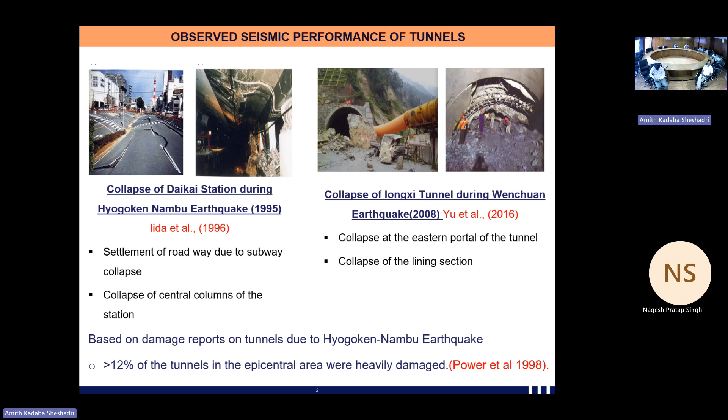So with this motivation, we attempted to understand how the performance of tunnels would behave under earthquake conditions. For that, we have aimed for both experiments and numerical study.

So in order to achieve that topic, we have gone through a few literatures wherein mostly the literature have been focused on tunnels embedded in dry sand and also in liquefiable sand.

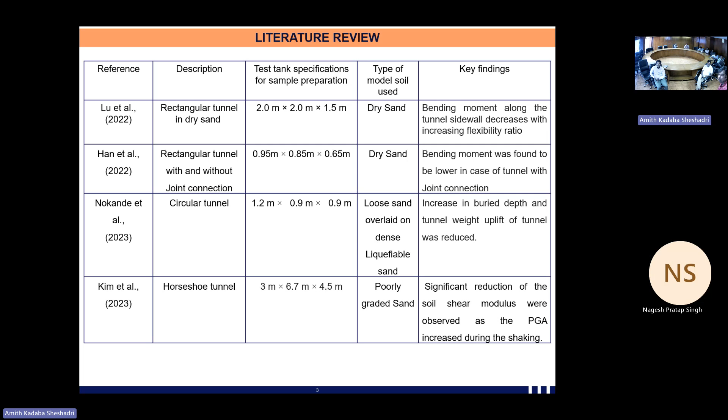But few studies have been conducted in varying saturated sand, and also few literatures have concentrated numerically, wherein mostly the shape, thickness, embedment depth, and flexibility ratio have been used as parameters for analyzing the tunnel using numerical analysis.

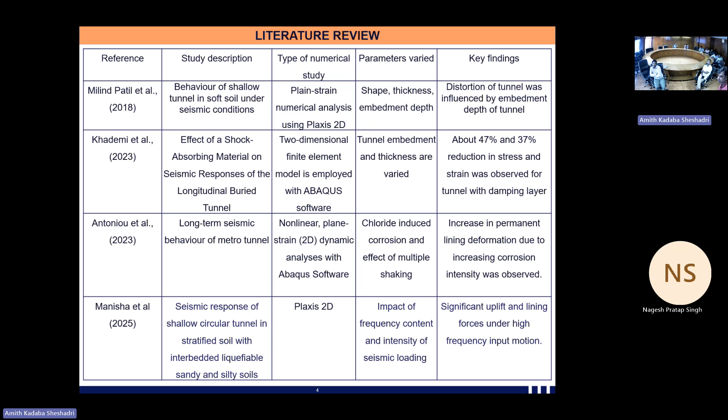So based on this literature, we could see that mostly the frequency and embedment depth of tunnel plays a significant role for understanding the tunnel soil interaction.

And also the acceleration showed higher amplification based on the past literature because of the increase in frequency of input motion. So this gap has motivated me to select influence of embedment depth and frequency on behavior of tunnel.

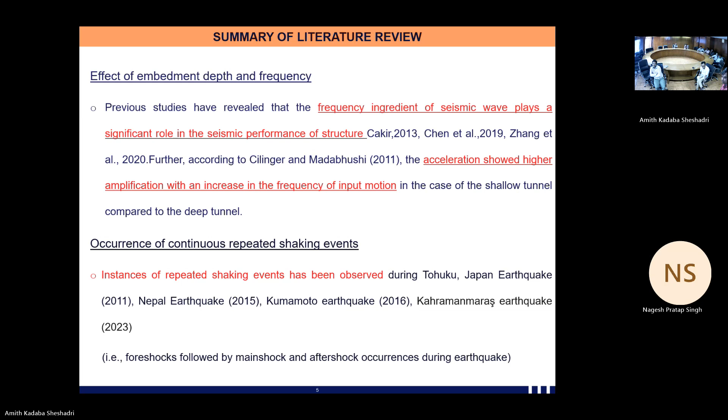And apart from this, we have observed from past literature and also from past case studies that there is an occurrence of continuous repeated shaking events, which has been observed during the Tohoku Japan earthquake, Nepal earthquake, Kumamoto earthquake, and Kahramanmaraş earthquake. Very few studies have been conducted considering the repeated shaking events.

And one more significance of the proposed research work is based on the construction of metro tunnel network, particularly in North India, wherein we could see that during 2002, only 25 kilometers were operational, whereas during 2022, more than 1,000 kilometers are operational.

And mostly these tunnels, which are situated, are in silty sand deposits, and with varying water table, it would affect the structures which are coming over those deposits. So considering all these topics...

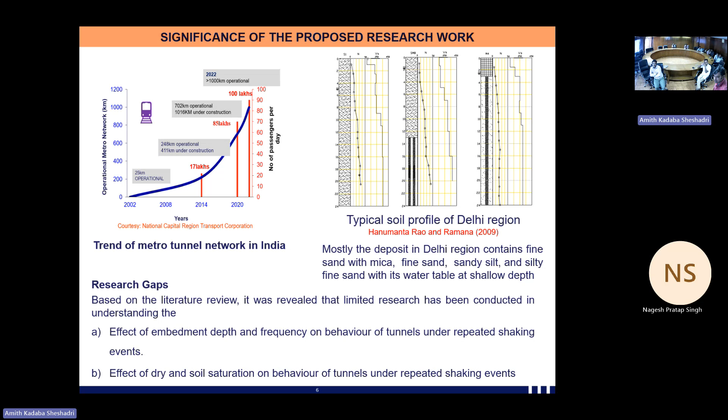Primary objective, one is considering the economy, considering the extent of economic loss, we formulated the research gaps and objective. And the main objective of my PhD topic is how investigation on tunnel soil interaction could be done using experiments and numerical studies.

For the experimental investigation, I have taken the influence of embedment depth and frequency as a primary parameter on behavior of tunnel in dry sand.

And further, we attempted to understand the influence of varying ground saturation condition on tunnel embedded ground subjected to repeated shaking events. And further, after completing all these experiments, we also tried to validate the numerical model using the experiments.

And again, we attempted to understand the effect of repeated shaking events, and at the end, how the effect of ground improvement could be effectively used for mitigating the vulnerability of tunnel. So this is the overall view of my PhD work.

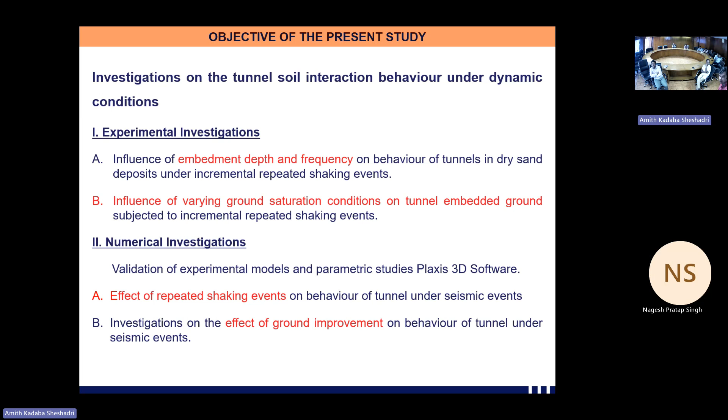And when it comes to approach one, initially the experiments were conducted in dry embedded ground. Particularly, I have chosen relative density of 52% corresponding to medium dense sand, and two embedment depths have been chosen with 5 Hz and 10 Hz frequency.

And the input motion used in this study were 0.2G, 0.3G, and 0.4G as repeated shaking events with 40 seconds duration.

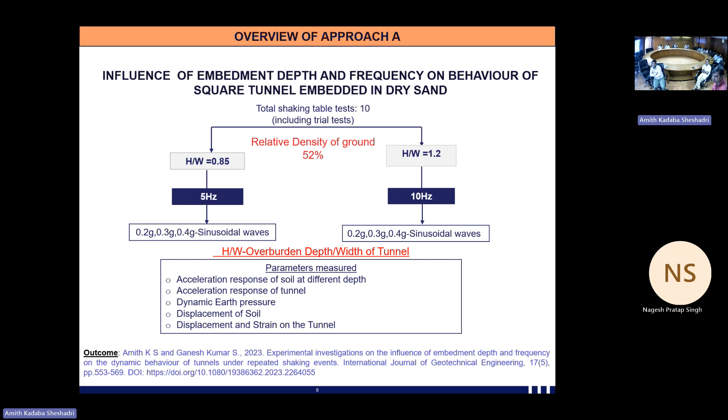For analyzing the tunnel soil interaction response, I have measured acceleration response of soil at different depth, acceleration response of tunnel, dynamic pressure, displacement of soil, and displacement strain on tunnel.

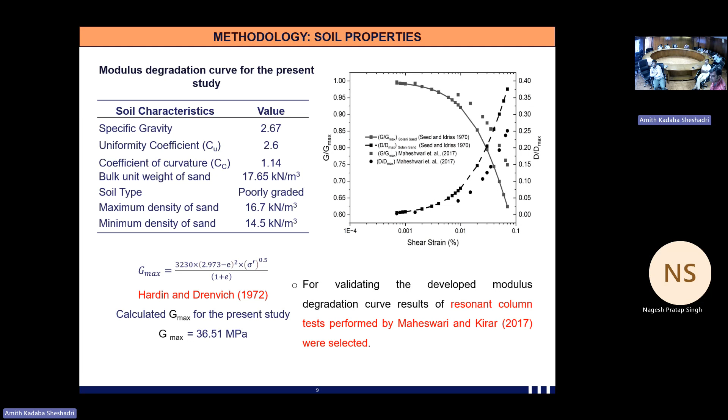For conducting this study, mostly the soil was characterized as poorly graded, and we also tried to develop a modulus degradation curve using empirical relationships. We validated the developed modulus degradation curve using resonant column tests conducted by Maheshwari and Kirar, and we could see that it comes under a similar range of the already available relationships.

For the experiments, the shake table was used, with dimensions of 2 meter by 2 meter and a payload capacity of 3 ton. The operational frequency ranged between 0.01 to 50 Hertz with an acceleration range of 0.01 G to 1 G.

The tank dimension used for the study was 1.7 meter by 1 meter by 0.7 meter. This is the actual scaling laws used in this study, where a 1:10 scale ratio was used to scale down the tunnel. Accordingly, the dimension of the tunnel is internal length of 270 mm and external length of 270 mm, and length of tunnel of 740 mm, according to the specification of the test tank dimension.

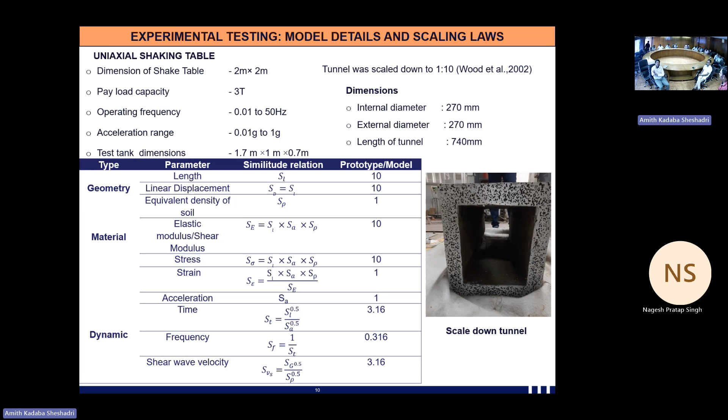This is the instrumentation details used in this study, where 3 accelerometers, 2 earth pressure sensors, and 2 displacement sensors have been used for both embedment depths. We also measured the acceleration response of the tunnel by placing 2 accelerometers at the tunnel top and 1 earth pressure cell at the tunnel top.

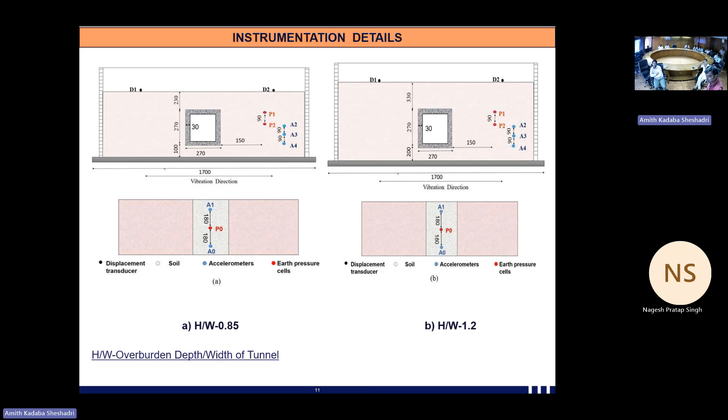Another part of this study is finding out the displacement strain on the tunnel using non-contact digital image correlation, wherein we could measure the displacement of the tunnel by taking a reference image initially before the test. We could also measure deformed images during shaking, and these two images were correlated for finding out the displacement of the tunnel. For this we used VIC 2D software for conducting the analysis.

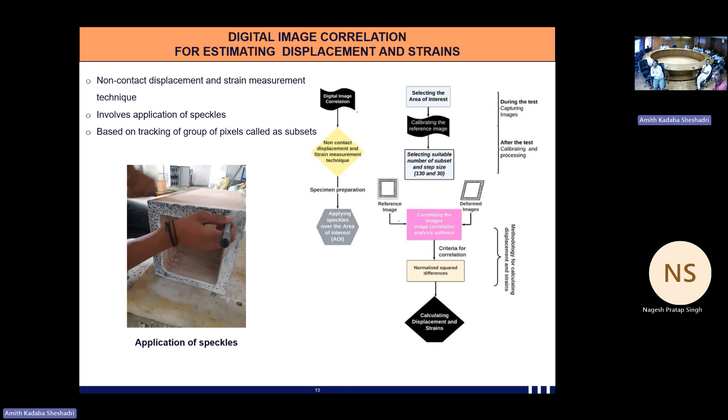Based on the experiments, during 0.2G shaking corresponding to height to width ratio of 0.85, minimum displacement was observed because of its in situ density. For 0.3G shaking, significant maximum settlement was observed, mainly because densification occurred at this 0.3G level. Further doing 0.4G shaking, there was a reduction in soil settlement, mainly because of densification that occurred during 0.3G shaking. So both frequency and embedment depth and confinement characteristics play a role.

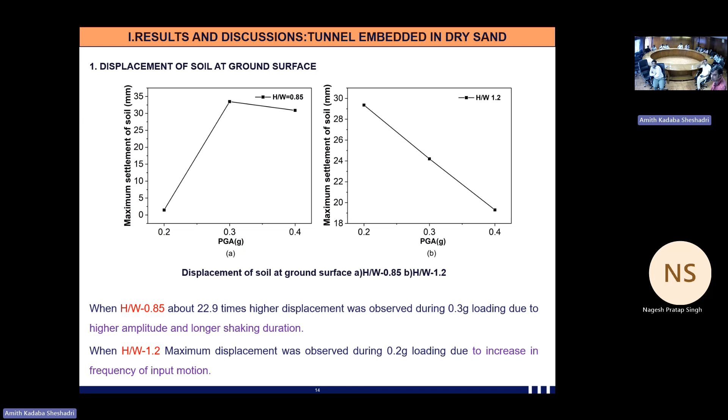About 22.9 times higher displacement was observed during 0.3G shaking for height to width ratio of 0.85. Whereas for height to width ratio of 1.2, initially itself maximum densification occurred, primarily because there was an increase in frequency for this case, which affected the displacement response.

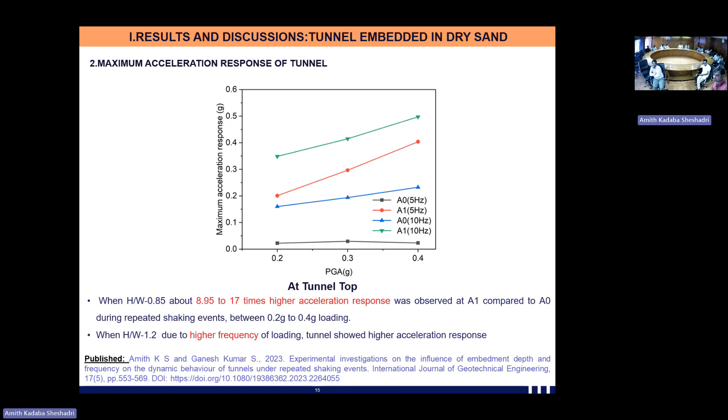We also measured the acceleration response of the tunnel. From this figure, we could see that the front end of the tunnel showed higher acceleration response compared to the rear end, and with increase in frequency, the acceleration response also increased. This is primarily due to the non-uniform densification which occurred due to shaking, which affects the acceleration response of the tunnel.

We also measured the acceleration response within the soil, and from these figures we could see that with increase in embedment depth, acceleration response also increased, and at shallow depth there is higher acceleration response, primarily due to soil nonlinearity. For the 5 Hz frequency, about 34 to 58% increment in acceleration response was observed, and for height to width ratio of 1.2, about 17.9 to 33% higher acceleration response was observed at different depths.

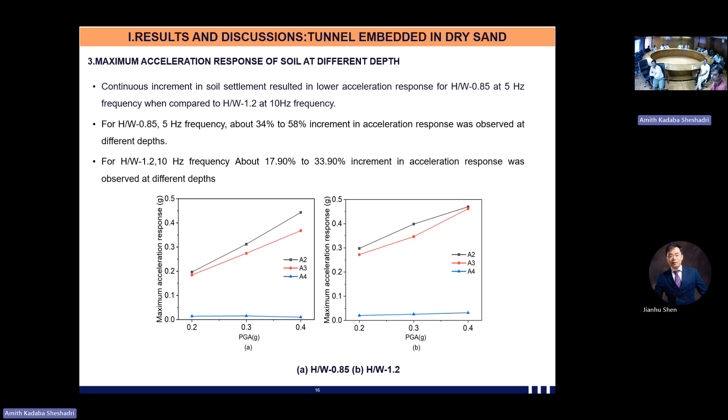We also measured the displacement of the tunnel using digital image correlation, and we could see that with increase in input motion, the displacement increased for the case of height to width ratio of 0.85, a similar trend observed for height to width ratio of 1.2, although higher displacement was observed during the 5 Hz frequency case.

The reduction in displacement is primarily because of higher confinement characteristics for the height to width ratio of 1.2, which affected the displacement response.

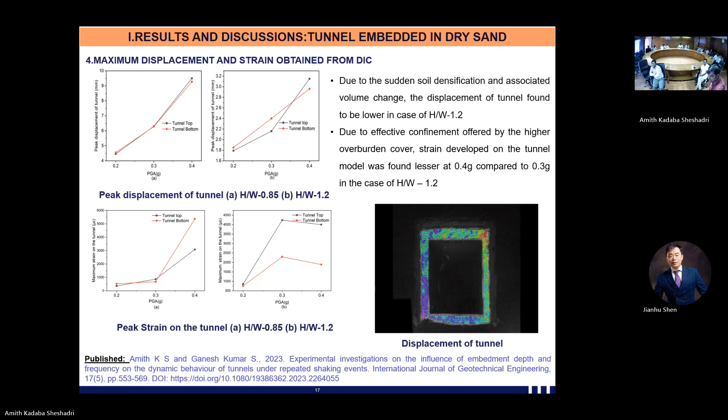We also measured the strain, and using the strain response, we can see that for the 5 Hz frequency, increment has been observed for the case of 0.2G, 0.3G, and 0.4G shaking, whereas after 0.3G shaking for the case of height to width ratio of 1.2, sudden reduction in strain have been observed for the 0.4G shaking.

This could be related to the development of earth pressure, which affected the tunnel soil interaction response. Primarily because of the variation in stress between the tunnel and the surrounding soil, the strain also varied.

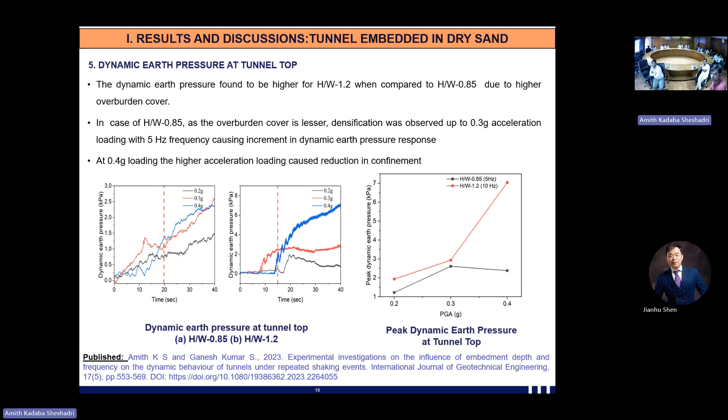Based on this study, we could conclude that the application of 5 Hz frequency during repeated shaking induces an increment in soil densification, which contributed to overburden stress around the tunnel system, affecting the response.

Similarly, about a 14 to 58% increment in dynamic earth pressure was found up to 0.3G loading for both embedment depth conditions. In the case of height to width ratio of 0.85 when subjected to incremental shaking, there is a steep increment in strain.

This steep increment in strain was observed from 0.2G to 0.4G shaking, mainly because of the lower confinement. In the case of height to width ratio of 1.2, the reduction in strain at higher acceleration loading is due to improved confinement offered by the adjacent ground.

This research has been published in the International Journal of Geotechnical Engineering in 2023.

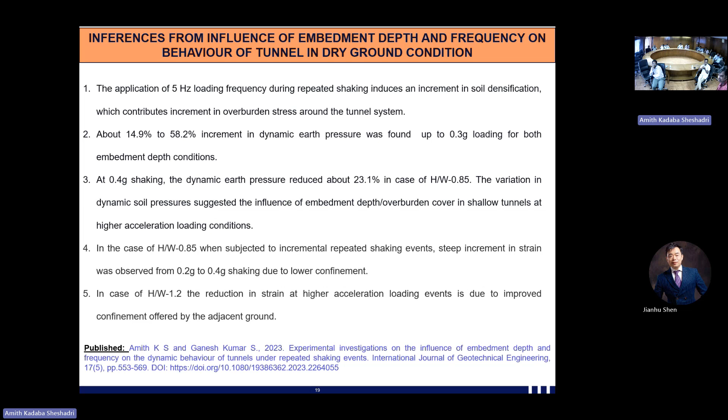Further, after conducting this study, we thought of understanding how saturation would play a role in affecting the soil interaction response. So we took both square tunnel and circular tunnel as our objective, wherein for the square tunnel we tested 25%, 50, 75, and 100% for varying saturation test cases.

Sinusoidal waves from 0.1G to 0.5G shaking have been given as input corresponding to 5 Hz frequency. Here also we try to measure the tunnel soil interaction response by measuring acceleration response at different depths, pore water pressure, dynamic earth pressure, displacement of soil, and displacement of tunnel.

When it comes to circular tunnel, similarly, we attempted to understand whether there would be any changes. So we varied the saturation to 50, 75, and 100 percent, and here we used scaled down earthquakes of Kobe, El Centro, Chichi, and Japan earthquake, all applied as repeated earthquake motions.

For conducting this test, initially gypsum was used for sample preparation of the scaled down tunnel, and similar to previous cases, we used a hopper arrangement for sample preparation, with wet sedimentation technique used for achieving saturation. The sand used was Solani sand, similar to the previous objective, and 4 pore pressure sensors, 2 accelerometers, 3 earth pressure cells, and 1 displacement sensor were used for monitoring the variation in response.

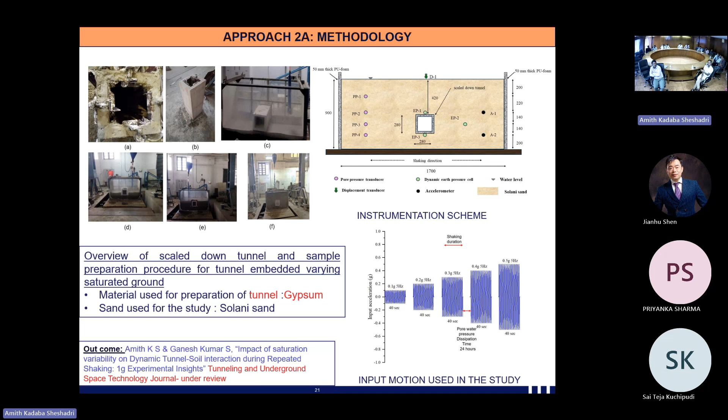Based on the experiments, we actually used only 2 accelerometers and displacement sensors as told earlier.

For the shallow depth, higher acceleration response was observed compared to deeper depths. We could see from the graph that up to 0.3G at shallow depth, higher acceleration response was observed, beyond which there is a drastic reduction in acceleration response at shallow depth.

Similarly, for the case of deeper depth, we could see that the acceleration response increased with respect to input motion. This variation is primarily because of non-uniform densification and also because of the soil non-linearity which could develop due to the repeated shaking.

The other part of the reason for the reduction after 0.3G shaking is primarily due to soil settlement, which beyond 0.3G shaking has drastically reduced, affecting the acceleration response also.

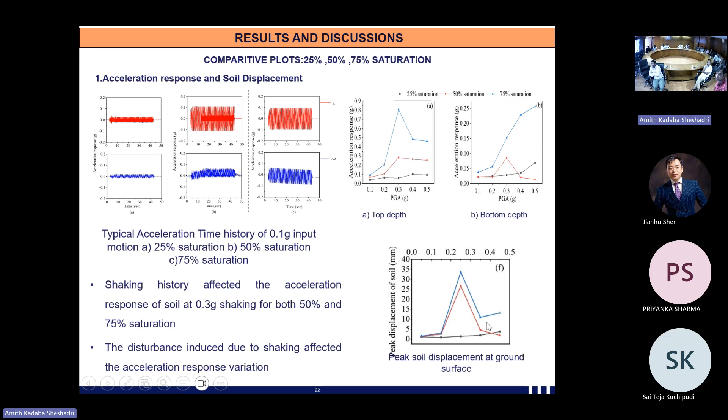We measured the pore water pressure, and based on it we estimated the pore water pressure ratio. For the case of 25% saturation, no significant increase in pore water pressure was observed, whereas for 50 and 75% saturation, a slight increment in pore pressure was observed.

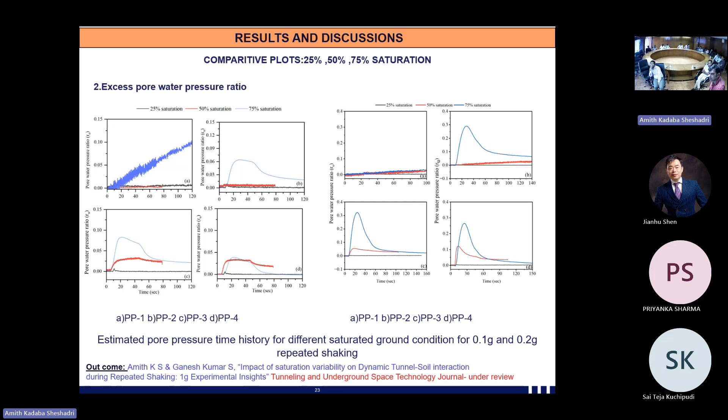Although no liquefaction was observed initially, for the case of 0.3G and 0.4G subsequent shaking, we could see that because of the shaking history, liquefaction occurred, and for the case of 0.3G and 0.4G subsequent shaking, we observed almost complete liquefaction.

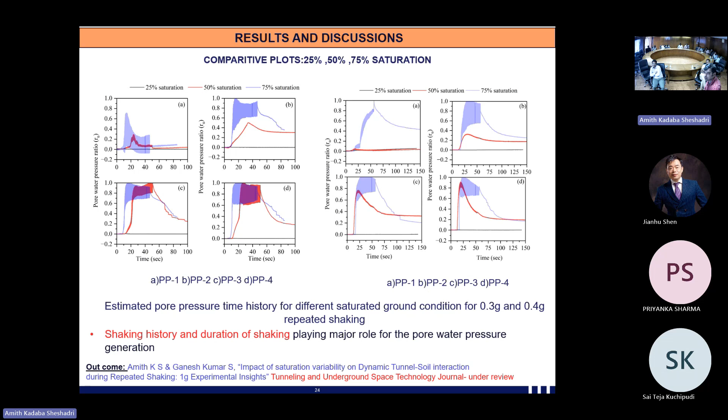Complete liquefaction occurred for the case of 0.3G and 0.4G shaking, which was primarily due to the shaking history and duration of shaking, which played a major role in the occurrence of liquefaction. This continued even after

0.4G shaking also. For the case of 75% saturated ground condition, because of this development of pore water pressure at different depths, the peak displacement of the tunnel increased with respect to input motion.

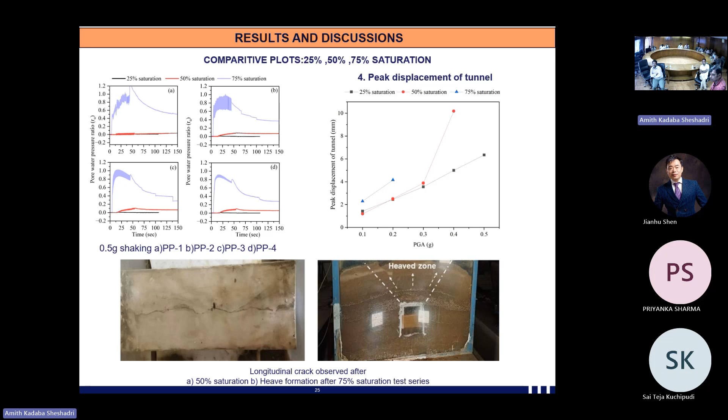Based on these experiments, we also observed physically that there is a longitudinal crack for the case of 50% saturation, which affected the stability of the tunnel. We also observed complete heave of the ground surface for the case of the 75% saturated test series.

But after 0.3G shaking, we could observe a slight reduction in pore pressure. This is primarily due to the displacement of the tunnel, vertical displacement which occurred during 0.2G to 0.4G shaking, which affected the pore pressure ratio.

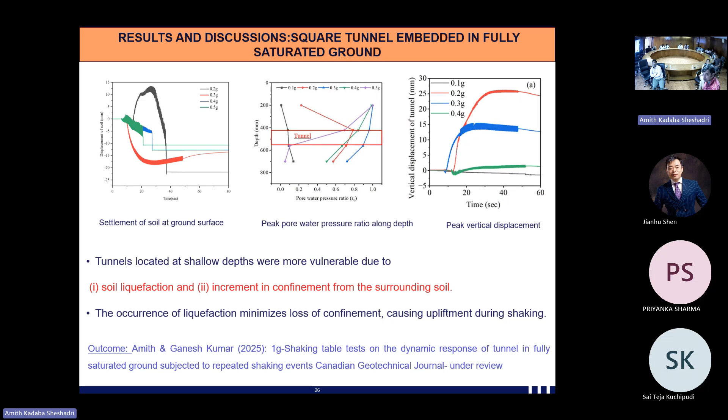Based on these varying saturated ground conditions, we could infer that the acceleration response variation at different depths highlighted the occurrence of non-uniform soil densification, and influence of saturation played a major role for tunnel-soil interaction response.

Based on the pore pressure ratio, primarily due to the influence of repeated shaking history, soil saturation affected the acceleration response, and liquefaction and reliquefaction occurred during 0.3G to 0.5G shaking.

About 1.2 to 1.7 times and 1.6 to 1.93 times higher displacement was observed, which is primarily due to the pore pressure development at different depths.

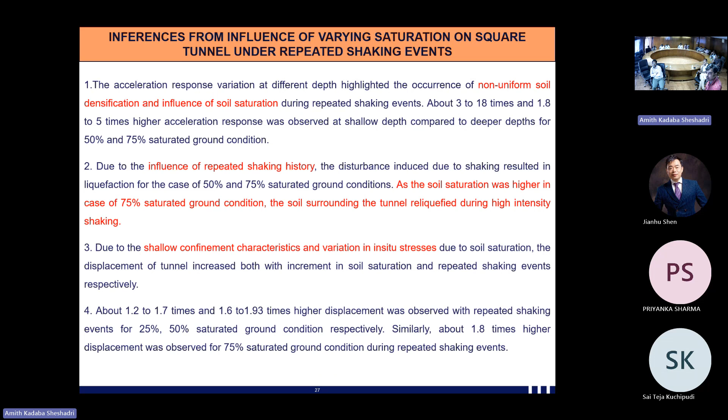Based on the fully saturated ground, we could infer that up to 0.3G shaking, with limited embedment depth, tunnel uplift was observed. At 0.4G and 0.5G shaking, the stability of the tunnel reduced by about 15% to 89%, which induced variation in stress transfer between the tunnel and adjoining ground developed after shaking.

Even for the fully saturated ground, soil saturation affected the tunnel-soil interaction response, mainly because irrespective of the minimum generation of pore water pressure during 0.1G shaking, the induced disturbances during 0.1G shaking resulted in tunnel upliftment for the 0.2G shaking.

Overall, what I want to conclude here is primarily because of shaking history, the tunnel-soil interaction and liquefaction along with reliquefaction is occurring during the repeated shaking events.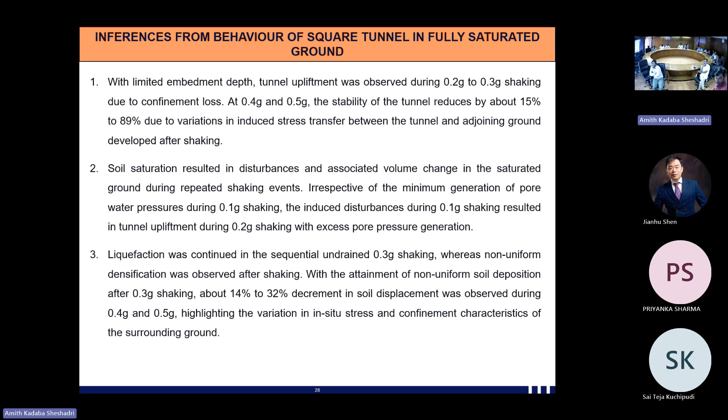After conducting all these experiments, we thought let us go for how scaled down earthquake will affect the tunnel-soil interaction response.

Since for the previous case we could not measure much pore water pressure increment for the 25% saturation, we only concentrated on 50, 75, and 100% varying saturation, with 52% as a relative dense ground.

For the scale-down tunnel, we used a locally available concrete tunnel, which has an internal dimension of 195 mm and external diameter of 245 mm, with the length of the tunnel as 740 mm.

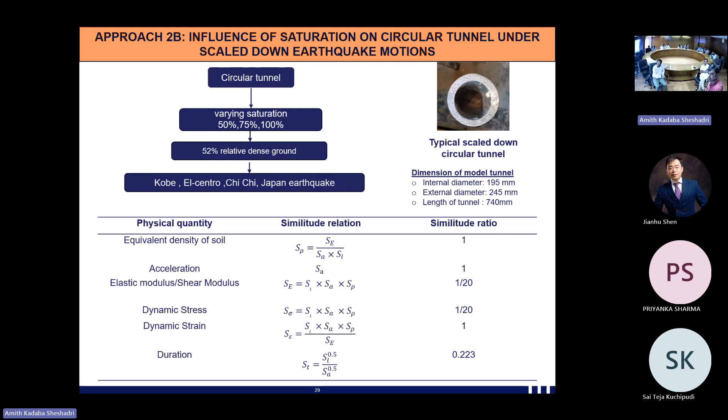Here, mainly duration has been scaled down in order to simulate the earthquake condition in the shake table. Similar to the previous case of preparation of sample, we also prepared a similar setup for the circular tunnel.

We have used 4 pore pressure sensors, 4 accelerometers, and 3 earth pressure sensors for measuring the tunnel-soil interaction response, and we also used a DIC setup for measuring the

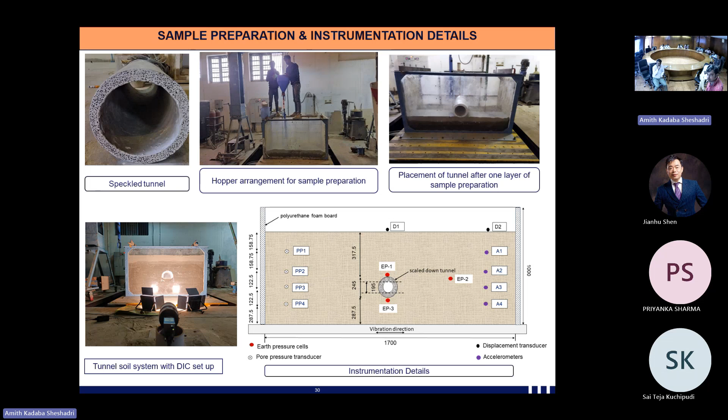Based on the experiments, we could observe that at shallow depth there is higher acceleration response, at mid depth there is a slight reduction in acceleration response, and at deeper depth significantly lower response has been observed.

This is primarily due to soil nonlinearity and also due to the densification which could occur because of the existence of the tunnel.

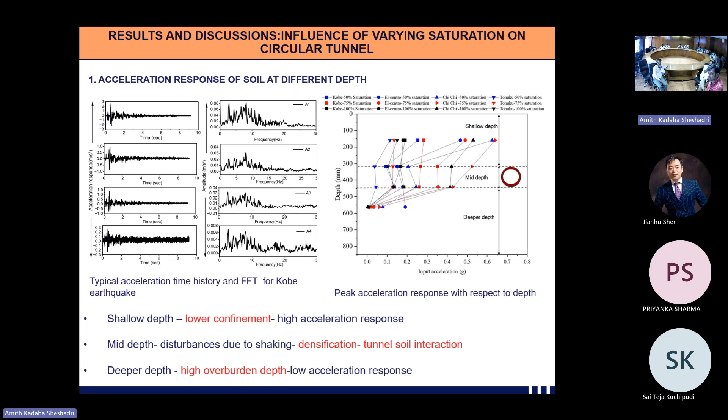We observed increment in pore water pressure with respect to input motion, and higher pore pressure has been observed, which is obvious with increasing depth.

Due to continuous shaking, disturbance in the ground causes pore water pressure generation, and the pore water pressure generation during shaking encourages tunnel displacement. So here, similar to the previous case, primarily because of soil saturation and shaking duration, tunnel-soil interaction affected the generation of pore water pressure.

We measured the displacement of the tunnel, and this is obvious because of the loss of confinement. Displacement increased with respect to input motion and also with respect to saturation.

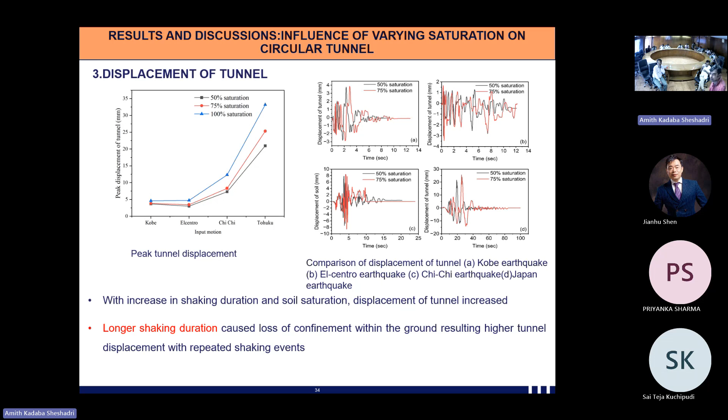Based on these experiments, we inferred that acceleration intensity contributed significantly in inducing tunnel deformation, in addition to shaking duration. Higher the acceleration intensity, time for pore water pressure generation was found lesser, affecting the confinement characteristics of the ground. As told earlier, soil saturation significantly influenced the dynamic performance of tunnel during repeated shaking.

From the estimated pore pressure ratio, it is evident that influence of saturation induced liquefaction of soil, and at higher acceleration amplitude, soil liquefaction around the tunnel was observed, even though soil densification was achieved during initial repeated shaking. So based on this study, because of repeated shaking, the tunnel underwent more displacement and strain.

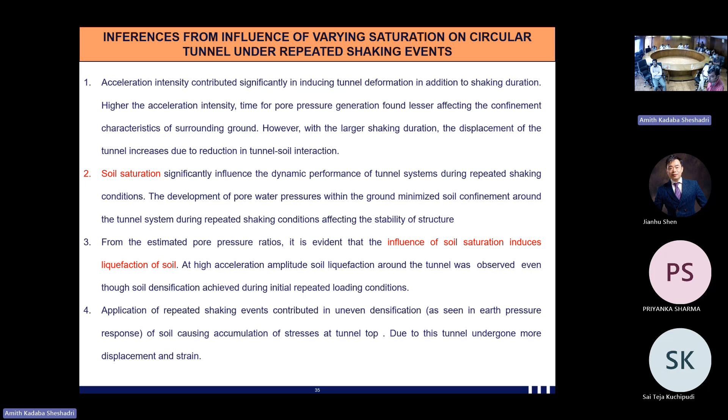After conducting these experiments, this is the part of the work which I completed at RMIT, wherein we used all the details of experiments in order to validate the numerical model. For the numerical model, I have used UBC3D-PLM model, and two parametric studies have been conducted: initially the effect of repeated shaking was justified, and also the effect of ground improvement was studied in this research.

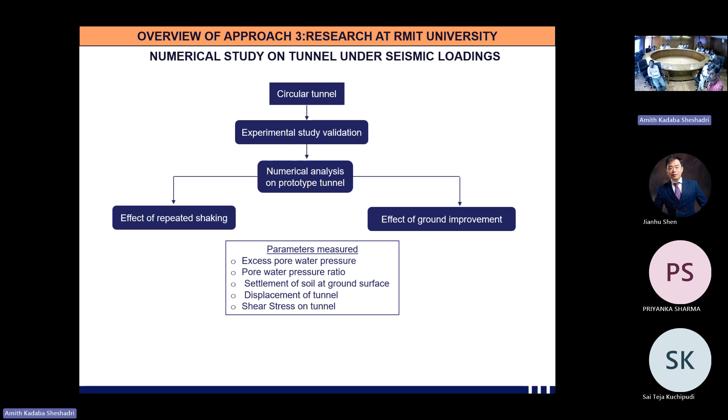For conducting the numerical model validation, we used similar dimensions as that of the shaking table, and primarily based on the SPT N value, all the parameters have been calculated using Plaxis 3D. These empirical equations have been given in the Plaxis 3D manual for calculating the input parameters, and mainly linear elastic plate elements have been used for modeling the tunnel, with an interface reduction factor of 0.66 used for simulating the interface between tunnel and soil.

These are the details of dynamic and static boundary conditions, wherein the bottom boundary was completely fixed, and a compliant-based boundary was used at the bottom for simulating the earthquake. Here, the Kobe earthquake was used as input motion, and Rayleigh damping coefficients were calculated in order to accommodate the soil nonlinearity.

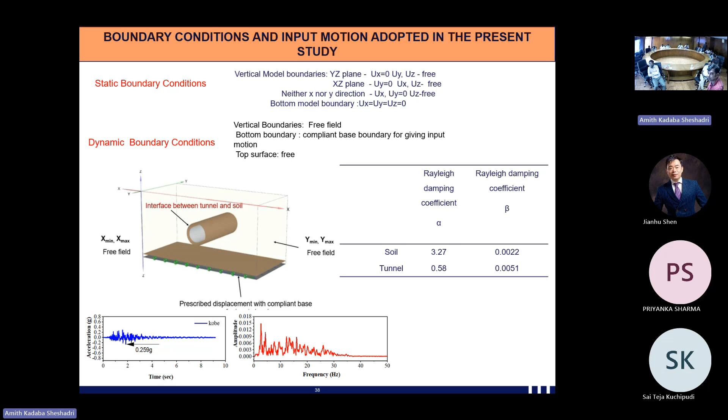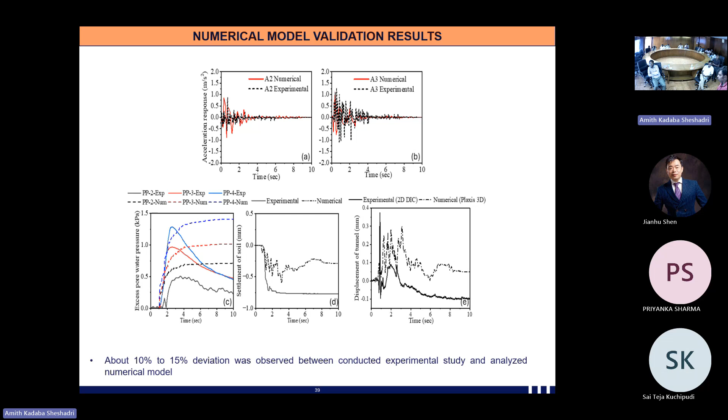This is the graph which shows the numerical validation, wherein we tried to measure the acceleration response at different depths, pore water pressure, displacement of soil at ground surface, and tunnel displacement. Based on this validation, we could see around 10 to 15% deviation observed between the numerical model chosen and the experimental study conducted.

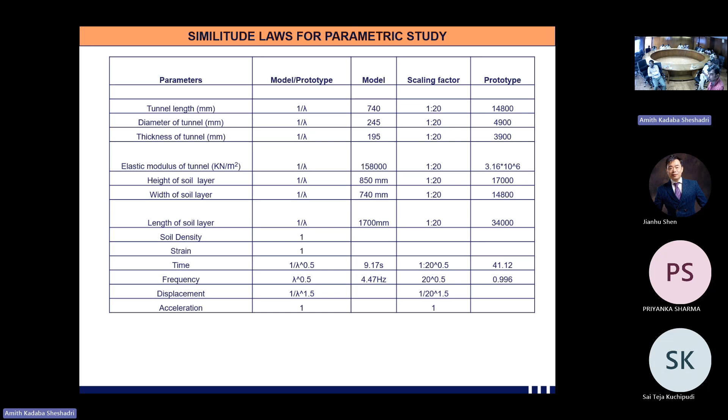After conducting this validation, we again went for further studies to simulate in full scale. In order to analyze the numerical model in full scale, we have used scaling factors according to 1:20 ratio, and all parameters have been calculated. This is the full scale numerical model, exactly scaled up as per the scaling laws. Again, the input parameters have been calculated based on SPT N value, and the relative density of ground simulated is similar to the medium dense ground condition in prototype scale.

So based on this study, for the part of ground improvement, the first part of the parametric study was to simulate the repeated shaking.

Whereas for the repeated shaking of 0.5G after 0.2G, although there is significant improvement in excess pore pressure development up to 38 kPa, which is comparatively lesser than individual shaking, we could still observe maximum displacement of up to 80 mm for the case of 0.5G shaking after 0.2G.

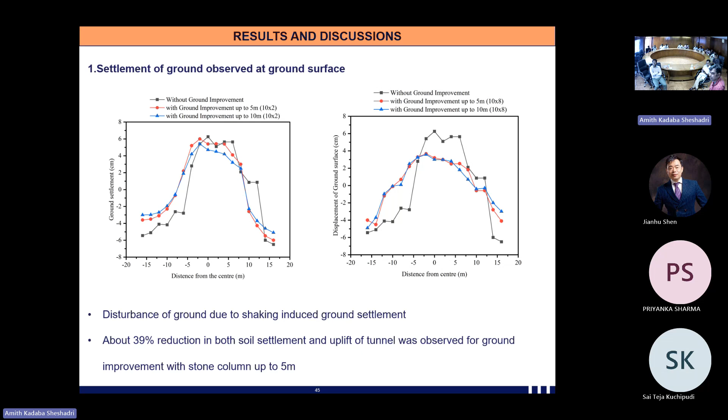We could see that for the case of ground improvement up to 5 meter, having a configuration of 10 cross 2, there is no much reduction. Whereas for the case of 10 cross 8 configuration, for ground improvement up to 5 meter and 10 meter, there is almost a 39% reduction in soil settlement.

We also measured the uplift displacement of the tunnel, wherein we could see that almost 58% reduction in tunnel upliftment has been observed for the case of 8 cross 10 configuration, particularly for both 5 meter and 10 meter ground improvement.

We also measured the pore pressure ratio for the tunnel embedded ground, and we could see that for the case of 5 meter, there is no much reduction in pore pressure, whereas for the case of 10 meter ground improvement, only at shallow depth there is significant reduction in pore pressure ratio, whereas pore pressure increased at deeper depths.

From this, I can conclude from the numerical investigation that although the 10 cross 2 column was not found effective for mitigating the upliftment of tunnel, for the case of 10 cross 8 configuration, we could see drastic reduction in tunnel displacement and also pore pressure ratio. So this is the complete overview of my PhD work.

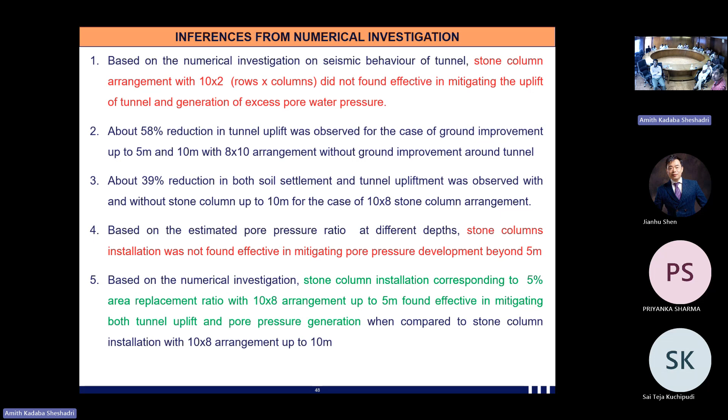I would like to conclude here with the future scope of the study: the observed response of all these experiments could be used for real-time monitoring of tunnel structures, and we could also conduct a centrifuge study particularly for layered soil and slopey strata, because there is no much study on slopey strata.

We could also extend this study for the development of a fragility curve to assess the performance of tunnel under earthquake conditions. Through numerical investigation, only limited ground improvements have been observed, conducted based on time availability. Different configurations of ground improvement can be used for further studies.

So these are the details of my publications. 2 publications have been published in the European Journal of Environmental and Civil Engineering, and also in the International Journal of Geotechnical Engineering. 2 are currently under review, and 2 are at the preparation stage. 3 book chapters have been published based on the study conducted, and 3 conference papers I have written during 2021 to 2023. This is the overall view of my PhD.

This is the overall view of the thesis outline, wherein I have formulated my thesis for 6 chapters: the first 3 chapters are devoted to introduction, literature review, and experimental methodology. Chapter 4 and chapter 5 are experimental and numerical investigations, and chapter 6 is conclusion and future recommendations.

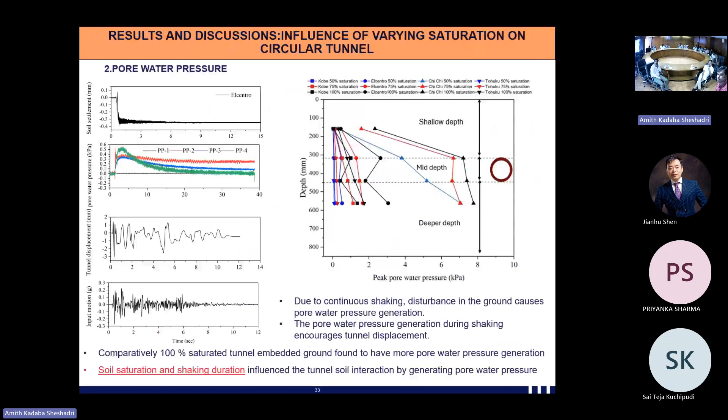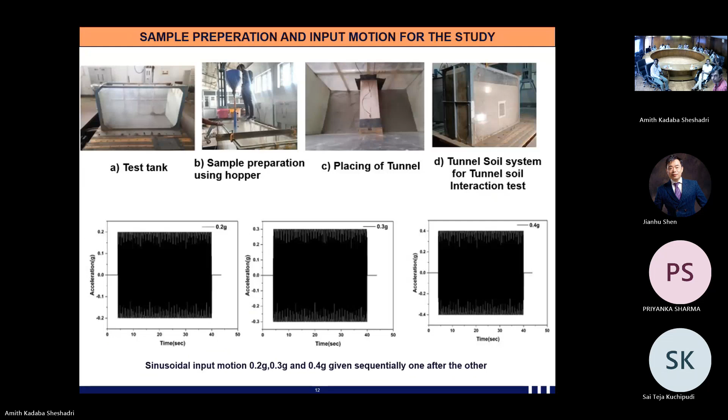Okay, and as per the literature, if the height to width ratio is less than 1.5, it is considered as a shallow tunnel.

Secondly, your first part was on square tunneling. Here also the question was, was it sequential or individual? This is incremental, sequential incremental shaking.

Okay, in this case, that's why you get to 0.4 G, this amount. Yes, it is related, maybe because of the complexity. Yes. And let's go to the numerical work, the numerical work.

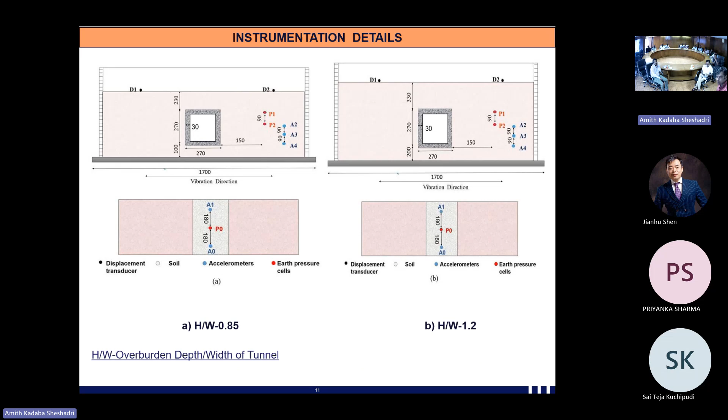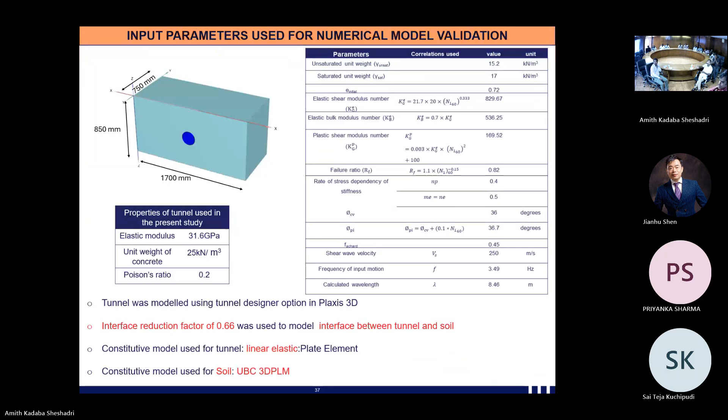So, over the ground improvement part - how do you give the stone column coordinates? If you use stone columns, it's in different patterns, like 8 by 10, 2 columns by 10. Diameter of the stone column is 200 mm, and spacing is 3 meters in each column.

Difference between these two, and then their depth - initially 5 meter ground improvement and 10 meter ground improvement, particularly up to the tunnel wall. At 5 meters, you will not get quite different results. We need the top of it should be up to the bottom. Otherwise, there is no reason.

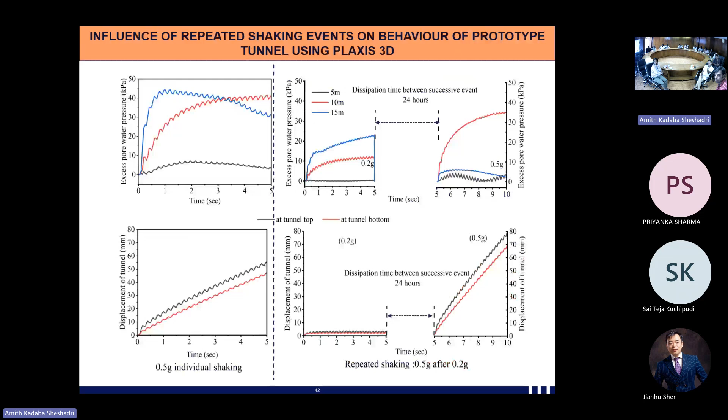Is there any difference between the 5 meter stone column and without stone column - can you compare? Without ground improvement, this is the vertical displacement of tunnel. With ground improvement for the case of 2x10 configuration, there is no much reduction, although 18% to 30% reduction is there. But for the case of 10 meter ground improvement with configuration of 8 by 10, almost 58% reduction.

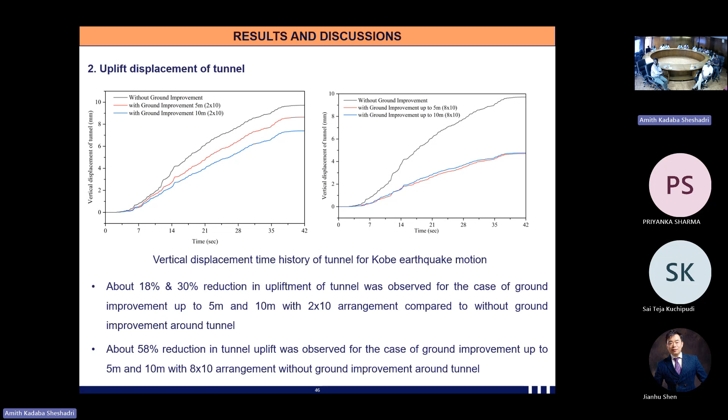And respect to number of rows also - what about pore pressure? For the 5 meter ground improvement, there is no much significant reduction in pore pressure. But for the case of 10-meter ground improvement with a configuration of 8x10 stone column arrangement, at shallow depth significant reduction is there, but at deeper depth, no much significant reduction.

What is this case? It's without stone column - these two are without stone column. And next, at 2.5 meter is 5 meter, 5 meter, and 10 meter. Are you reaching 1? Here it was not there, or what?

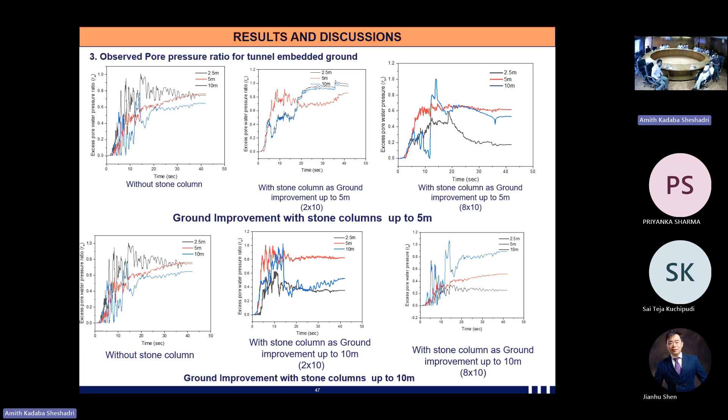And what are the properties of this stone column material you are taking? Permeability. This is what I told in between the presentation, Professor. This is the sand - actually I have written wrong.

The sand permeability and stone column permeability is almost in the ratio of 200 times. What about the angle here? That is angle for sand and stone column. What is the angle of friction? 40 degree and 37 degree.

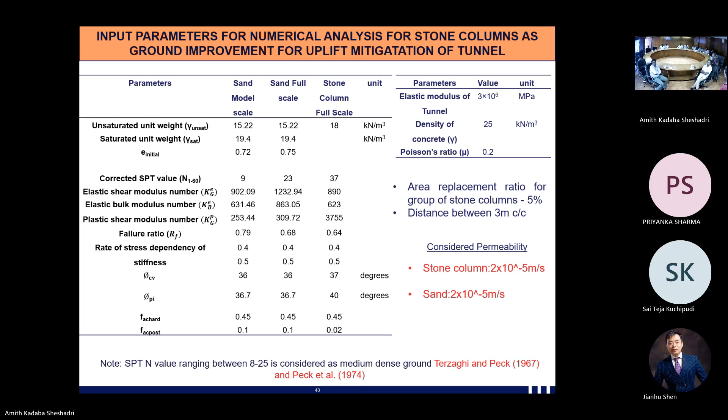Because that needs to be signed, 4 to 5 papers. Okay, and we will protect it. You have to get the print signed through places. You have to write the title, everything. You have to get it exactly right.

Can I add something, sir? I have written all the details, but the title has to be discussed with other DSC members also. Okay, actually I...

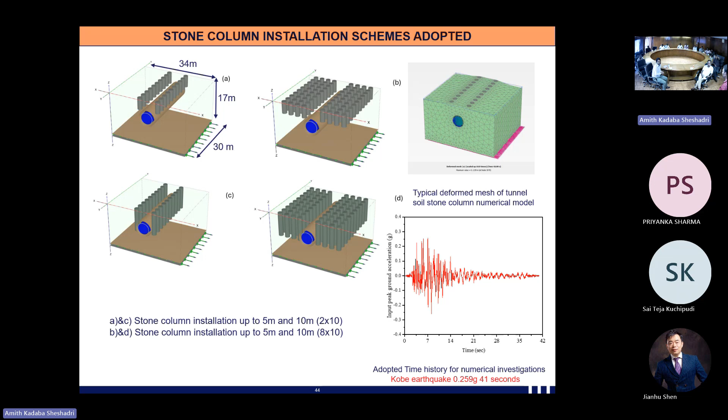Sorry, Professor, sorry for interruption. I just want to ask if there are any changes for the topic. You better ask that one first. Okay, sorry, but its work is good, so you can have some more clarification. Just keep on trying on that part.

So previously it has been discussed - that's why I say if in 1 year he gets there, you have to publish along with them. So that part, they have given this work as part of that program.

Okay, for one numerical model you can maybe reduce spacing - maximum up to 3D only. In this case, how much are you taking? If it's 500 diameter and 3 meter spacing... yeah, reduce it and see what results you are getting.

Please talk with them.